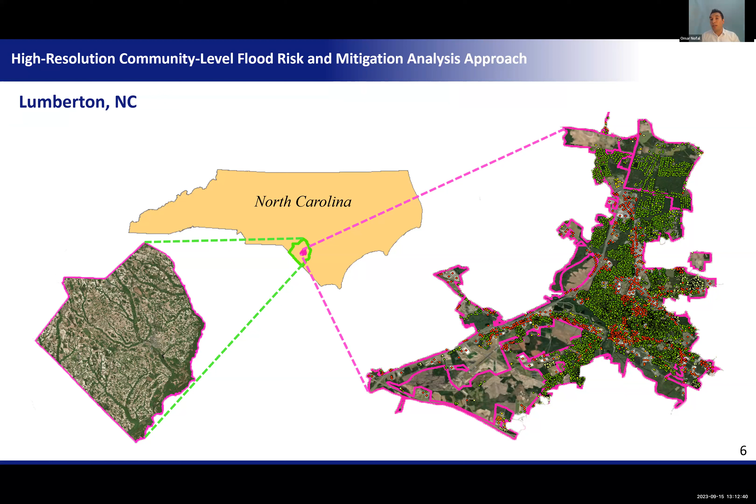Let's first see what the hazard modeling includes for this community. We developed a very high resolution hazard model. We used the digital elevation model of the study area and performed hydrologic modeling using detailed rainfall information along with land use and soil to identify the amount of water flow in each stream within the study area during an extreme event. The hydrologic analysis allowed us to capture a hydrograph, which is the amount of water flow over time. During an extreme event, the water flow peaks up, and after the event, it goes down.

So this is the main purpose of doing hydrologic analysis: to capture how the flow is changing in the main rivers within the study area. Then we use this flow hydrograph as a boundary condition for a hydrodynamic analysis to develop a hazard map. And this flood hazard map basically captures the spatial distribution of the flood hazard intensity, like the spatial distribution of the flood depths across the community.

Then we overlay these flood depths with the exposed assets like buildings and infrastructure to identify the level of exposure of each asset, like what is the flood depth at each building or at each infrastructure. Once we identify the flood depths or the flood velocity and the flood duration at each one of these assets, we can use vulnerability functions, which can be fragility or loss functions. And that tells us what is the failure probability of this asset corresponding to the flood depth that this asset is exposed to. So this is basically an overview of the flood risk analysis approach.

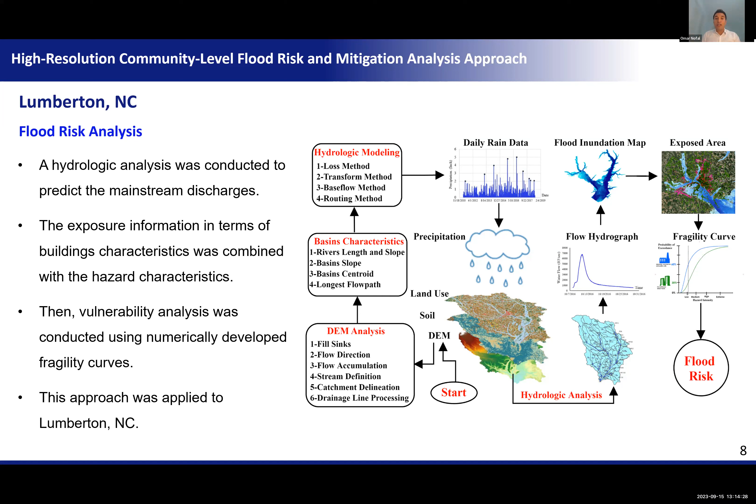So let's see what flood scenario we have here. We use the rainfall event after Hurricane Matthew in 2016 as a hazard scenario for this study. Hurricane Matthew started as a Cat 1 storm on September 29, 2016 in the Caribbean, and intensified to a Cat 5, but when it made landfall on the coastline of North Carolina on October 8th it was a Cat 1 storm, but it brought lots of rainfall to the inland communities. So it wasn't only a coastal crisis, but also inland communities such as Lumberton were exposed to lots of rainfall.

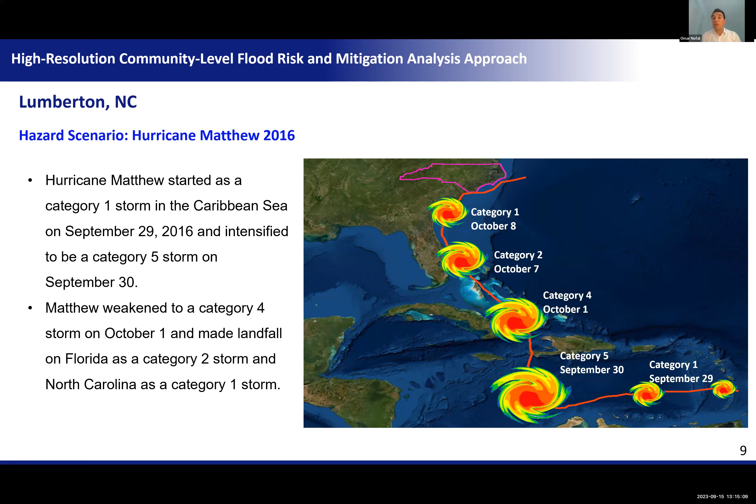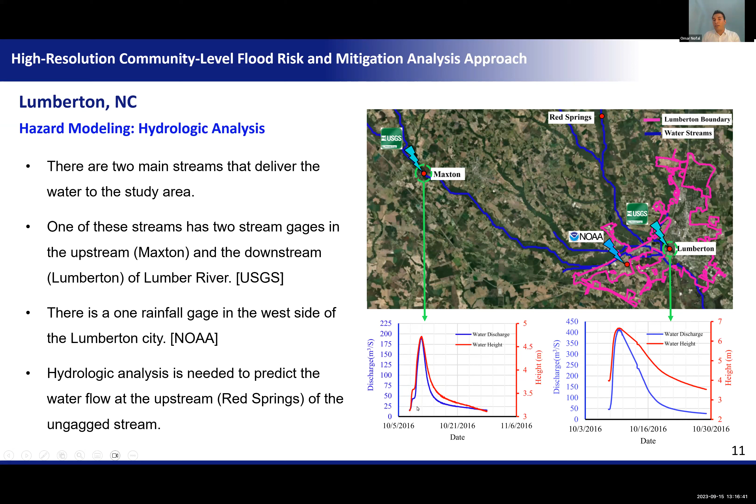So we used this rainfall information to perform hydrologic analysis, and we identified the amount of water flow in the main streams that deliver the water to the study area. As we can see, here's the geographical location of Lumberton, and the blue lines represent the main rivers that deliver the water to Lumberton. So the mission of the hydrologic analysis is to identify the water flow upstream, so that we can account for the amount of water flow downstream in Lumberton and identify the flood depths. Once we identified the water flow in terms of a hydrograph that captures the water flow over time, we use this as a boundary condition for a hydrodynamic analysis.

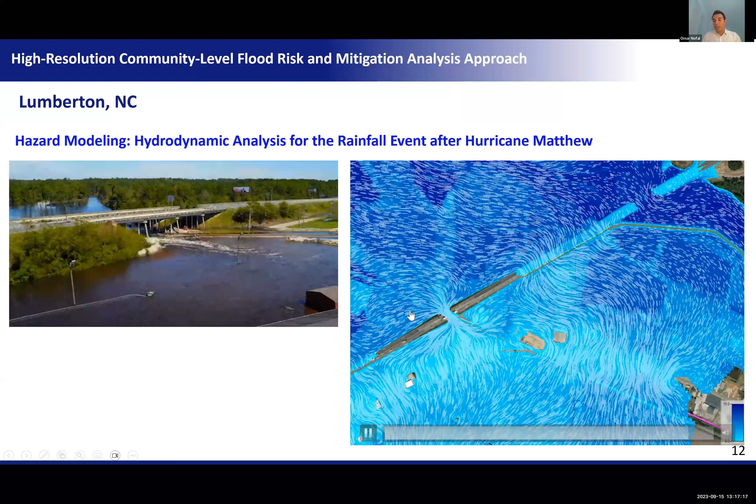And this is a close-up view of the state of flooding at the same bridge from a different flood, 2 years after this event, from Hurricane Florence. It had the same issue, but this flooding was much less than the one from Hurricane Matthew.

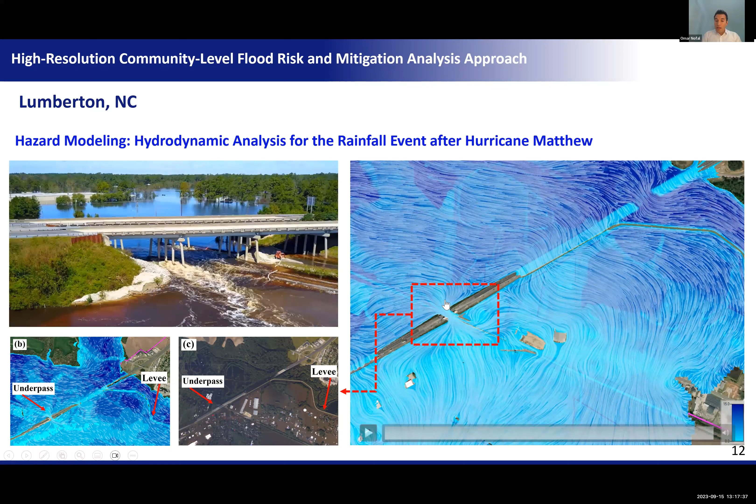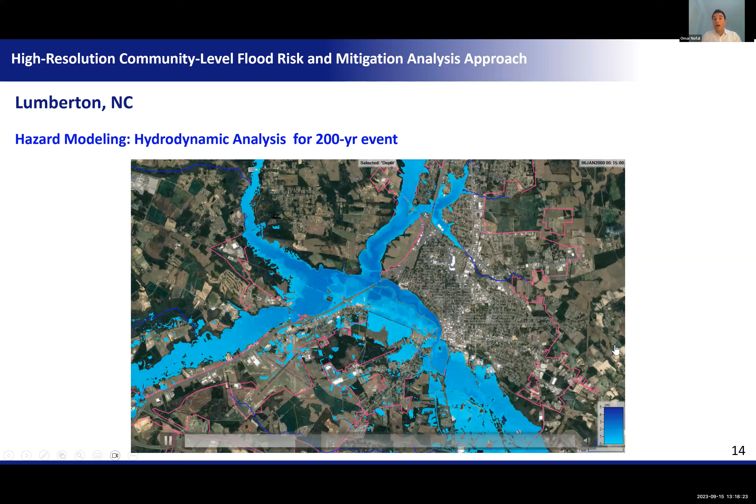And we have simulated a 200-year event, which is kind of similar to the flood event after Hurricane Matthew. As we can see, there's the same flooding behavior and around the same flood hazard intensity at most of the impacted Lumberton areas. So this is for hazard modeling. Right now I'm going to shift to the community and exposure modeling.

So we know the state of the hazard intensity across the community, but we want to know what assets are exposed to this flooding. But first, we need to identify these assets.

To identify the assets exposed, there wasn't much information at that time about the buildings in Lumberton. So we used Google Street View to navigate Lumberton city building by building, collecting detailed information about the buildings, specifically the first-floor elevation, because the first-floor elevation is one of the main parameters that accounts for the amount of flood damage inside the building.

But we collected other information, including building material, number of stories, occupancy, building use, building archetype, foundation type, ground elevation, building area, and maintenance status of the building. We collected lots of information about these buildings.

Then we developed a portfolio of 15 building archetypes. These archetypes include residential buildings, like we have 4 residential buildings, F1, F2, F3, and F4. We have a bunch of commercial buildings, including a gas station, a strip mall, super shopping centers. Also, we have some social institutions, including hospitals, schools and community centers. So we developed these archetypes to represent the different building typologies within the community.

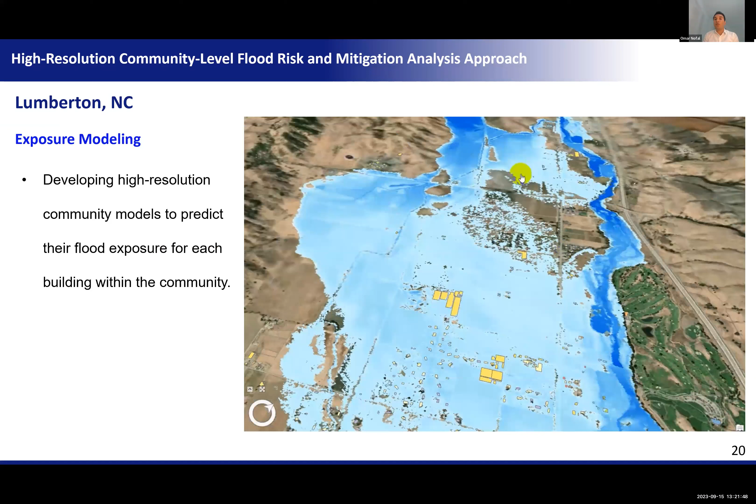After that, once we identified the community and the assets and their types, we overlay the hazard model that we have with the community model that we developed to identify which building is exposed to flooding and what is the flood hazard intensity at each one of these buildings. What is the level of flood hazard intensity? Like what is the flood depth? What is the flood duration? What is the flood velocity?

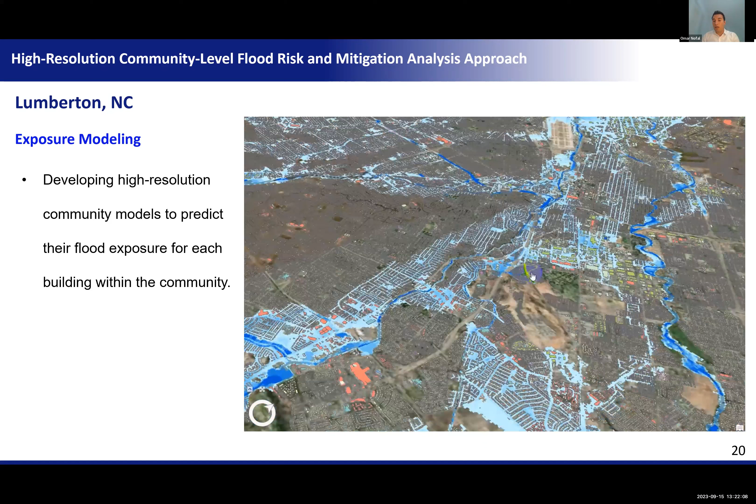And we applied this to many communities. This is just one example that shows how we accounted for the exposure at the community level.

So the next step is to do vulnerability analysis. We identified the hazard intensity at each building. So next we need to know, if a building has a 2-meter flood depth, what these 2 meters can do to this specific building. And definitely if this building is residential, it's completely different than if this building is commercial, because each has different components.

So we developed a single variable and multivariate flood fragility and loss analysis approach for buildings. Basically, if we have a building, we divided this building into components, and we studied the flood susceptibility of each one of these components separately. For example, we used a probabilistic approach using a truncated normal distribution that uses the upper and lower bound of the elevation or the damaging depths and the damaging duration for each component.

For example, if you have a TV in your home, this TV can be mounted on the wall, at 1.5 meters from the ground, or it can be on a table, like 2 feet from the ground. So you have an upper bound and lower bound for the elevation of the components. Same thing with the AC unit. Some people have the AC unit on the ground or elevated from the ground. So we did this for every component, and we used Monte Carlo simulation to propagate the uncertainties in the elevation, the damaging elevation and the damaging duration in each component.

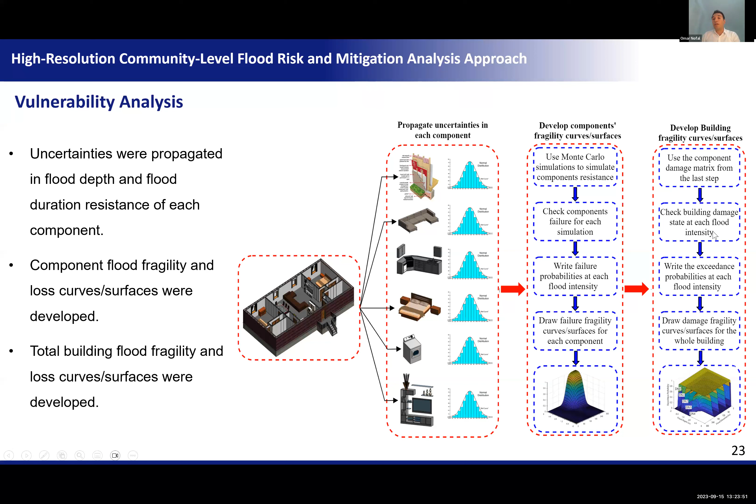Once we identified the failure probabilities of the components, we used the damage states that we developed to identify the exceedance probability of each damage state for the building. So this is an example that shows how the probability looks. This is an example for an AC unit.

So we used our best engineering judgment to identify the upper and lower bounds for each component within the building, and then we used a Monte Carlo simulation using the probabilistic parameters for the elevation of these components to propagate the uncertainties in the damage that can happen to each component within the building.

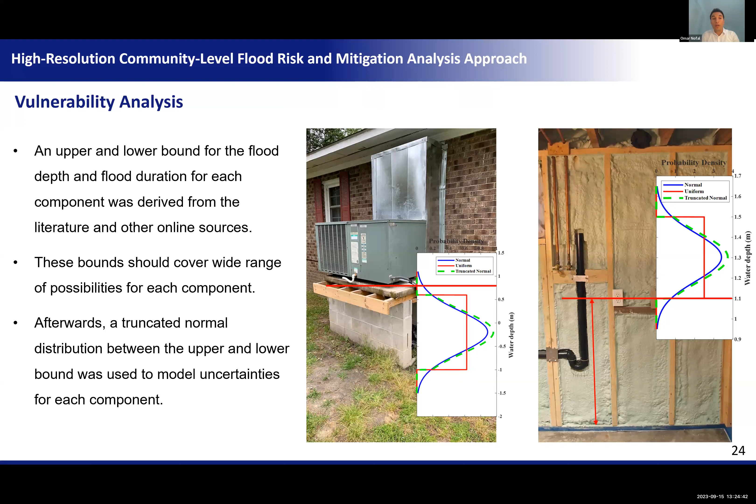This is an example of the damage states that we developed, from damage state 0 to damage state 4. Damage state 0 is insignificant damage, like the building can be surrounded by water but not damaged. Damage state 1 is like having 2 inches of water inside your home that can cause damage to the carpet and flooring. Damage state 2 is like having 2 feet of water inside your home that can cause severe damage to your appliances, content,

furniture. Damage state 3 is extensive damage, where the flooding reaches maybe 4 to 6 feet and causes severe damage, but not complete structural damage. For damage state 4, which is complete damage, we assume that the structure has complete damage, even damage to the structural system itself.

And we have all the statistical parameters for these components, and we grouped them based on their damage state. For example, you will find some groups are in damage state 0, some in damage state 1, 2, 3, and 4. This is based on our damage state description.

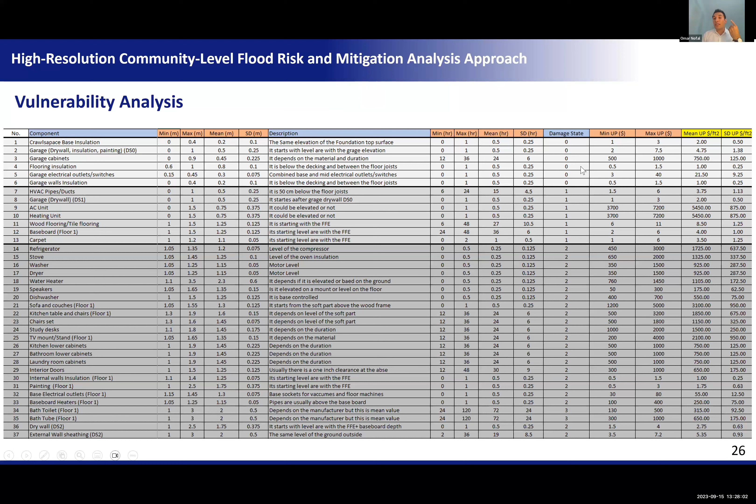As you can see, components 1 to 6 contribute to damage state 0. Components 7 to 13 contribute to damage state 1. So basically, the fragilities of these 6 components make up only 1 curve, which is damage state 0, and 7 to 13 make up 1 fragility curve, which is damage state 1. The same thing was applied for many other archetypes.

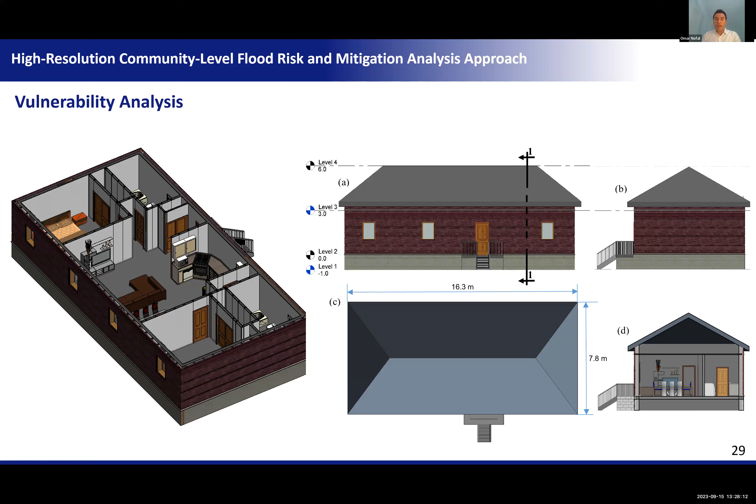So for example, if you have a fridge that is worth $1,000 and the failure probability is 50%, you multiply 50% by 1,000, so the loss is going to be $500. And if you have 100% probability, the loss is going to be $1,000. So as soon as the flood depth is changing, the failure probability changes, and also the losses are going to change. Same thing we have done with the building fragility curves.

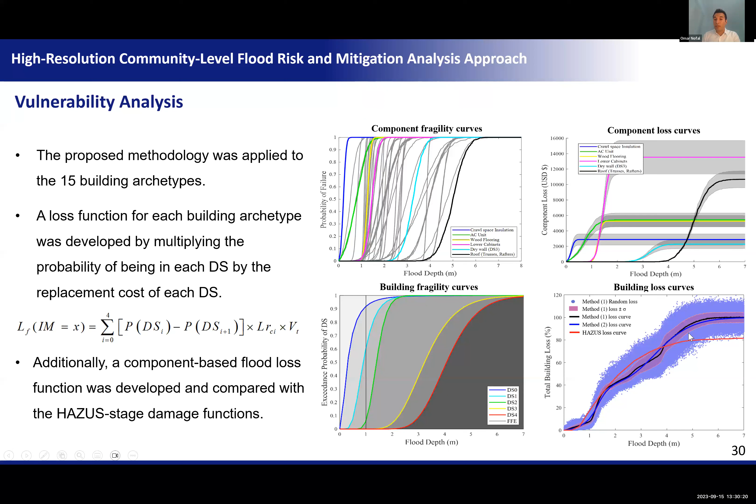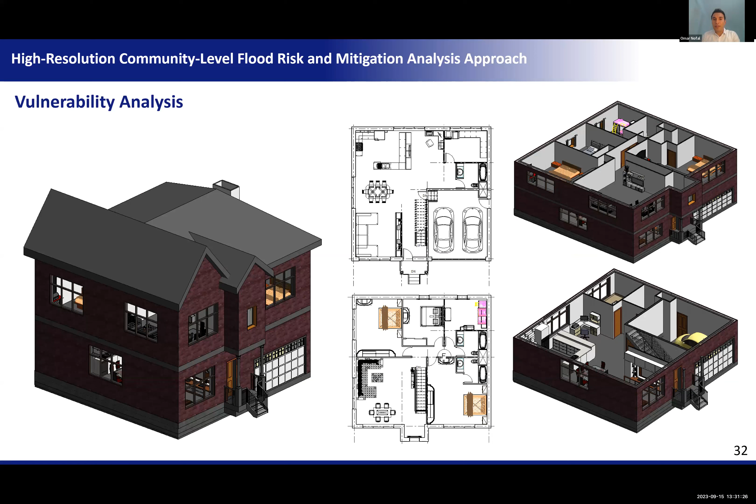We have applied this approach for all the 15 building archetypes. As you can see here, this is the 2-story residential building. We also have multifamily, 1-story multifamily buildings, gas station, shopping center like Walmart. And we build a BIM model for each one of these archetypes, representing each component within. In this Walmart example, you can see the fridges, the aisles, every section within Walmart. We take a real footprint of Walmart, even the loading area and all the storage area in the back.

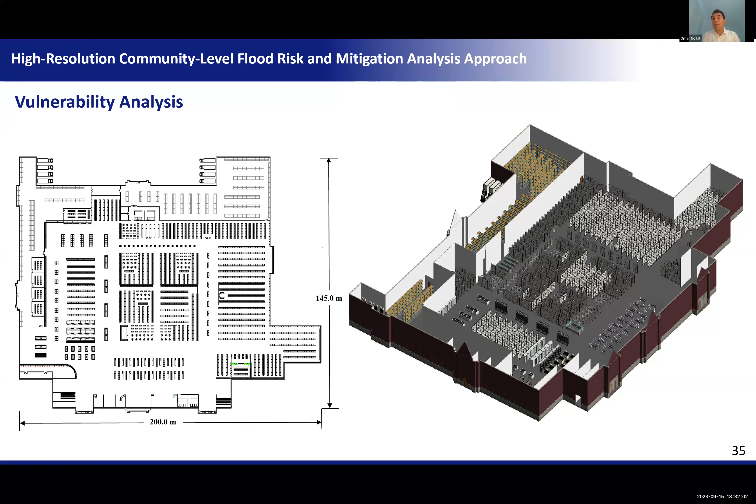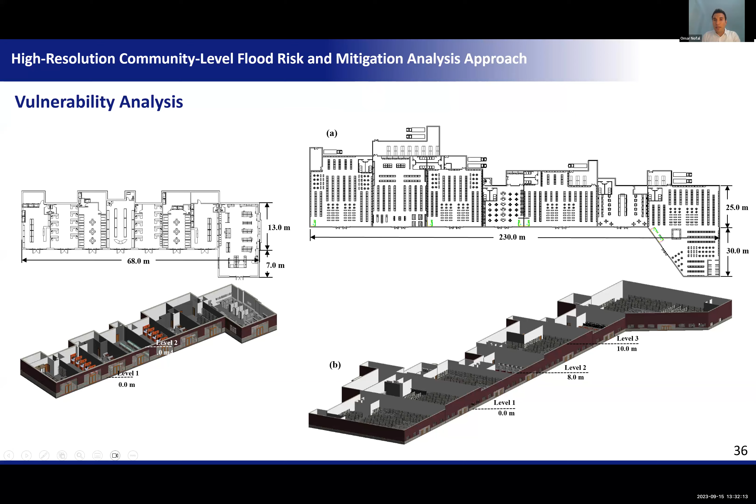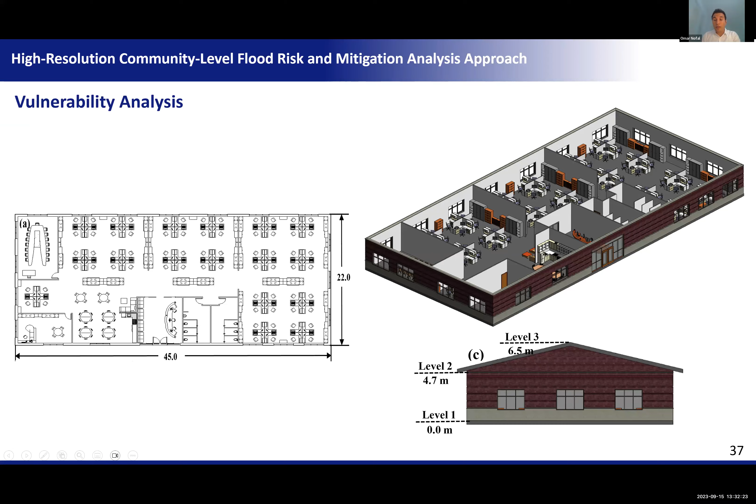So we have every component. We actually modeled every component in each shelf. Same thing with strip malls, multi-unit family buildings, office buildings. This office building is the same: we're including every computer device within this office, every component within each one of these buildings. Similarly, schools, hospital, community center. So we have done this for all these archetypes.

And this is just to summarize, showing the fragility curves for each damage state for the 15 building archetypes, from archetype F1 to F15. And this is damage state 2 with all the archetypes, damage state 3, and damage state 4.

I'd like to mention that the methodology that we developed for the flood losses has been used by the White House, by the Office of Management and Budget in the White House, to assess the impact of climate change on federal facilities. So the approach has been used widely in the industry and also by many federal institutions, including NIST and the White House.

So right now we have seen how the hazard models, the exposure models, and the vulnerability models were developed. And all of these are still separate. So how can we combine these three high resolution models to come up with a systematic approach that tells us the state of damage for each building within the community if it was exposed to a specific flooding event?

So we developed a community level vulnerability analysis that uses detailed information about the hazard, the building characteristics, the fragility curves, and does building by building analysis, identifying the exceedance probability of each damage state. For example, for building 1, identify the flood depths, use the specific fragility associated with this building archetype, and calculate the probability of exceeding each damage state, and then the probability of being in a specific damage state, and identify what is the maximum probable damage state that this building is going to have.

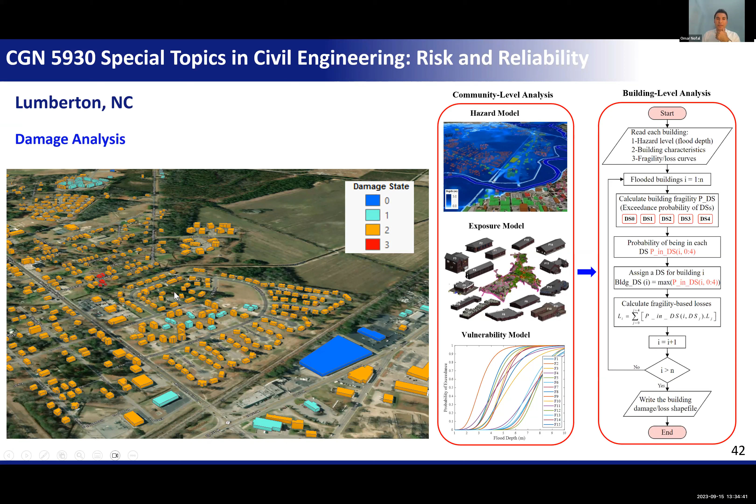So, for example, a building can have a maximum probable damage state of damage state 2. Then we assign damage state 2 for each one of these buildings, and then calculate the losses for each one of these buildings. Once we identify this for building number 1, we keep looping until we finish all the buildings. So this is the results for the buildings within Lumberton, color-coded based on their damage states from 0 to 3. We didn't have a damage state 4, so that's what we have so far.

With this, I'm going to shift to the next topic, which is the mitigation analysis. So how we took advantage of the method that we have developed to do a mitigation analysis at the community level. So there have been many mitigation approaches for buildings exposed to flooding. Some of them are at the component level, some at the building level, some at the community level. However, there haven't been many approaches that can account for the amount of saving that the building

is going to have. For example, if you use sandbags to protect your building, or even if you take advantage of the extra time that you have to elevate the water sensitive components, including furniture, electronics, like your computer, your TV, or any expensive component within your building that can be elevated in like 1 or 6 hours. So we were able to do this using this high resolution approach.

So basically, we developed a framework that used all the details that we have, including the flood hazard map, the building characteristics, and also information about the flood mitigation measures that we are using. Either the homeowner is using a water pump to decrease the flood duration, or the homeowner is using, for example, a flood barrier, like a bladder dam or a sandbag system, or whatever system that he has.

And then we do a vulnerability analysis using fragility on the left side. So this is the process for it. And on the right side is the vulnerability analysis using loss analysis. Like we need to know the amount of flood dollars that this homeowner is going to save by using this mitigation measure. So we either can have the vulnerability in terms of damage or in terms of losses.

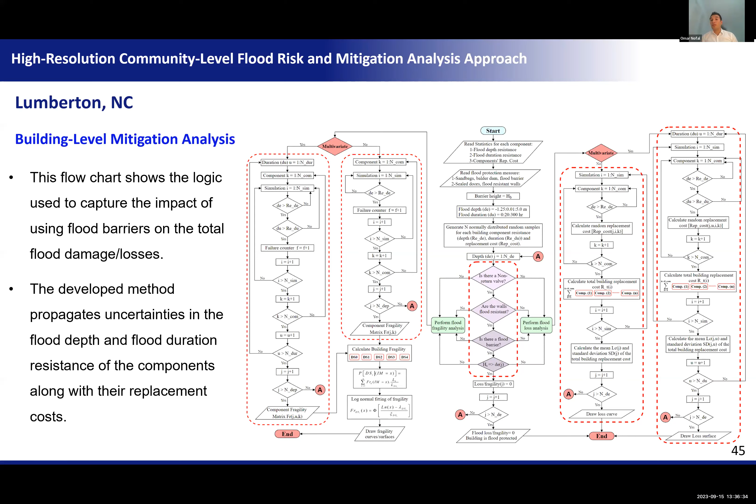So let's start first with using temporary barriers. So homeowners can use temporary barriers to decrease the flood depth. So basically, what we have done in our approach, if the flood depth is less than the barrier height, the amount of losses is 0. But if the flood depth is more than the barrier height, we are hitting back to the curve. Same thing with the flood fragility.

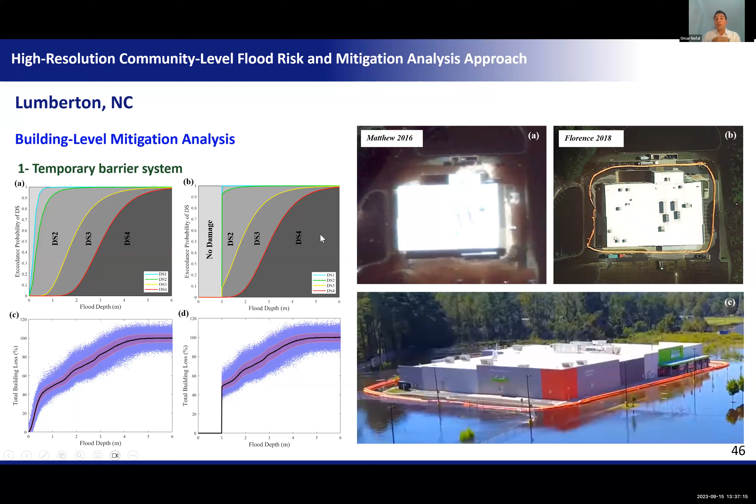So, for example, if you have a flood barrier of 1 meter, you have no damage, but if it's more than 1 meter, you will jump back to damage state 2 and 3 and 4. Also, we investigate the impact of using a water pump to decrease the flood duration. And we take advantage of the multivariate vulnerability function that we have. So we have the flood surface, and basically, if you are using a water pump to decrease the flood duration to 24 hours, we have a flood loss curve for 24 hours duration. We have one for 48, 6 days, 8 days, up to 10 days.

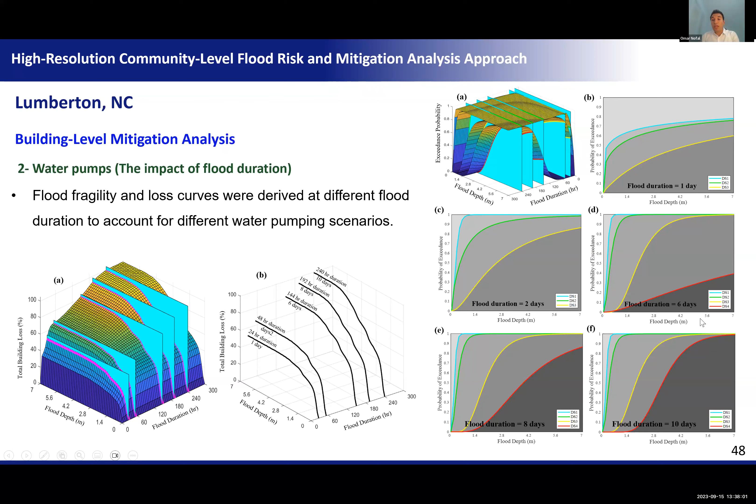Same thing with the fragility. So go to the next. Same thing with the fragility functions. So we have here the fragility function for 1 day, 2 days, 6 days, and also up to 10 days.

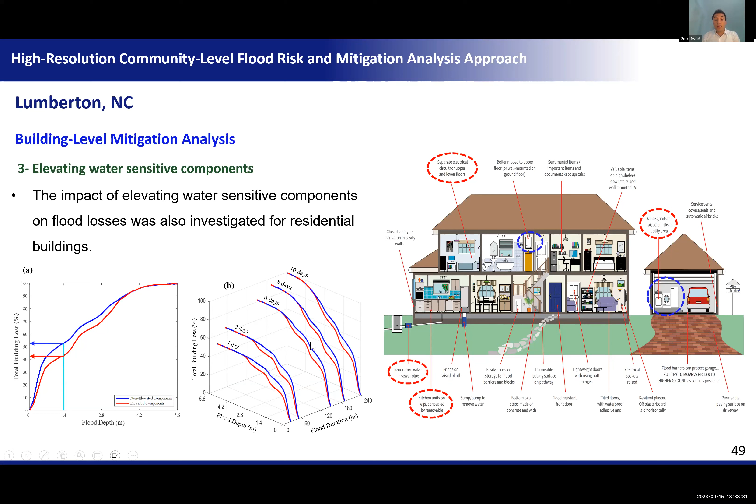Also, we investigate the impact of elevating water sensitive components. What if a homeowner was able to elevate TVs, computers, or any water sensitive component in his building? So we were able to capture the difference between buildings with non-elevated components and elevated components, and show loss savings of about maximum 10% of the building value, which can be maybe 20 to 50K based on the home value.

Also, we investigated a combination of mitigation measures. What if the homeowner were able to use a flood barrier like sandbags along with pumps? So we combine these together to come up with loss curves that can tell us what the combination of these mitigation measures is going to do in terms of flood loss reduction.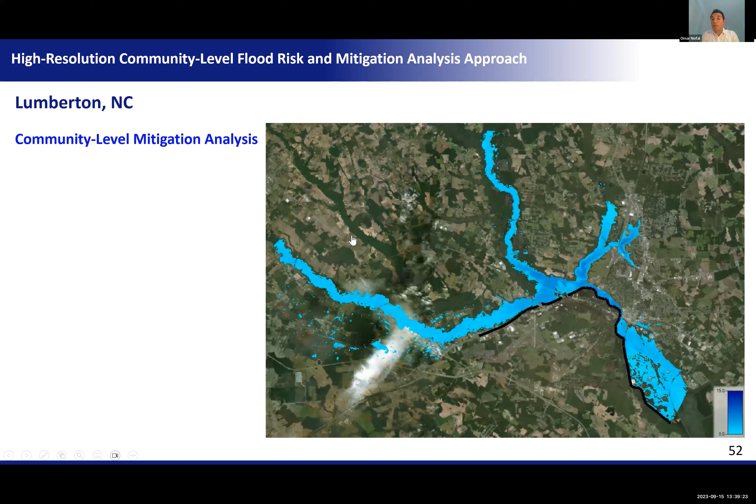Lumberton. I'm going to show one example of one of the mitigation scenarios at the community level. We enhanced the levee system, and as we can see, it provides full protection for the downstream here in Lumberton, and tamed the Lumber River to flow in its own stream.

So with this, let's summarize and conclude the work that I presented here today. I presented a component-based multivariate probabilistic flood vulnerability approach for buildings. It accounts for the impact of flood depth and flood duration on the amount of damage and losses for buildings. The developed vulnerability approach was applied to 15 building archetypes, and it's general and can be extended to any building of interest.

And we conclude that flood depth alone may not be enough to accurately predict the amount of flood damage, and the inclusion of flood duration gives a better estimate of the flood damage. The fragility-based multivariate vulnerability analysis that we have developed here can provide a mechanism to propagate uncertainties in the damage and loss estimates for buildings.

And combining structural and content damage can provide a better estimate of the final damage, because most of the functions out there rely mostly on structural damage, but content damage is as important as structural damage. For recommendations for future research, actually most of this future research we have been working on; we just submitted two papers this week related to this work.

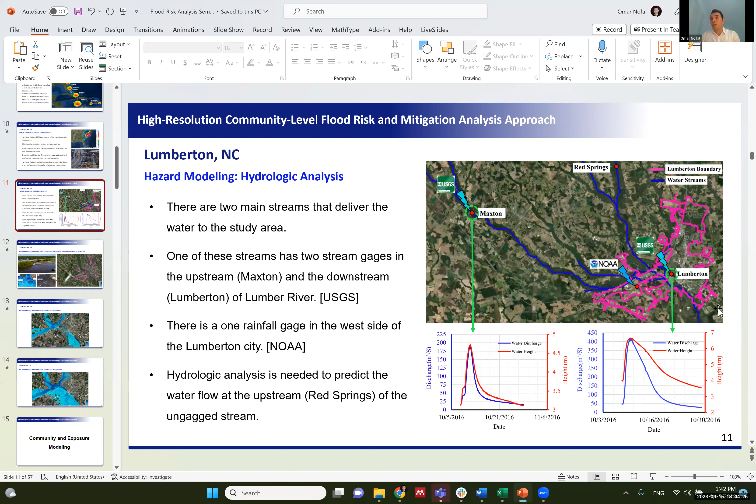Yeah, so there was a challenge here; we had to do hydrologic analysis because USGS provides the water flow at one of the upstreams, but one upstream, here at Red Springs, was missing, so there wasn't any USGS gauge. So we had to do hydrologic analysis to identify the water flow at this gauge. Then we validated it with the USGS gauges, and then we did all the hydrologic analysis for the study area to do the hydrodynamic analysis as the next step.

Okay, great. And one more question, it was, I guess, on slide 17.

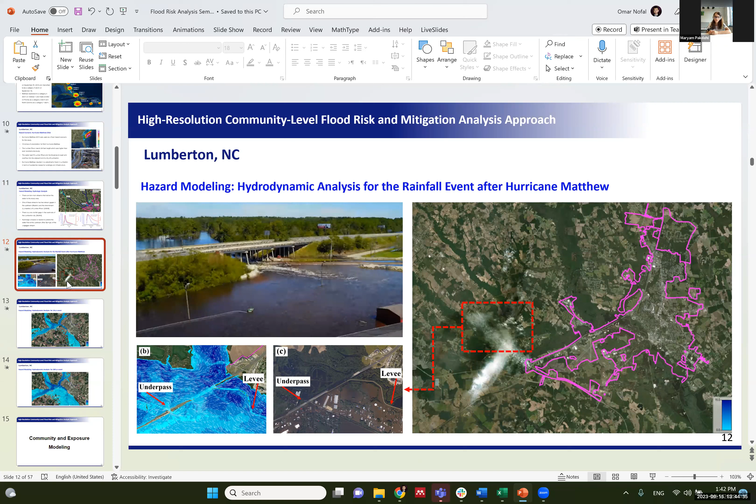Okay. I guess you found some building information, and this one? Yeah, that's it. And I want to ask where did you actually find this information? Because I want some kind of roof age information for different buildings, and I don't know how I can get them. Oh, you were asking how did I get the information for these buildings? Yeah, exactly. Well, I built these buildings from scratch, building by building. Ah, okay, I see.

Well, okay. So we tried as a team to identify, because right now these are 15 buildings, and the level at which they are modeling the community has a specific resolution. If we want to go up in resolution, we need to make these 15 into 100 or more, maybe 200. As soon as you increase the building typologies, you will have a more accurate model. But I cannot develop fragilities for all these buildings by myself. So we decided to come up with 15 building archetypes, and this is enough to model most of the buildings.

As you can see, we don't have buildings with more than 2 stories. So if we have a building that has 5 stories, it cannot be modeled, but most of the buildings within the community are around 1 to 2 stories. So if we have 10 or 15 that are multi-story, and we have 20,000 buildings, even if we have 100 or 200, it's fine, as long as we are trying to capture most of the buildings within the community.

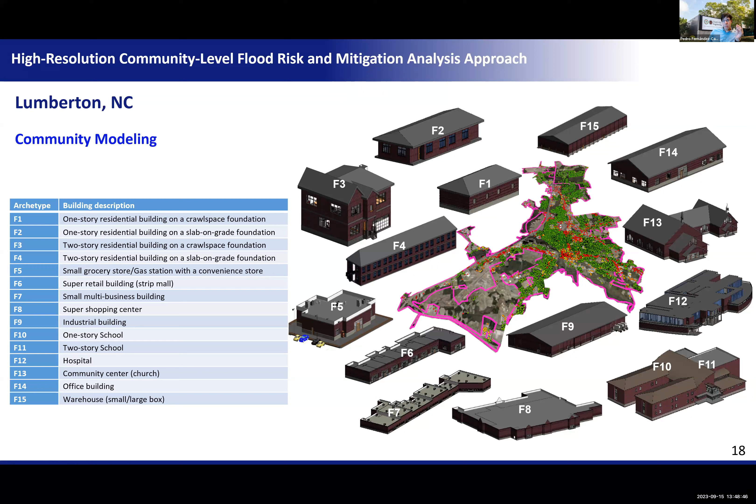Because I know a lot of our grad students work with GIS mapping, but I think resolution is usually a problem if you want to go really fine, high resolution. And other types of information you mentioned, for example first floor elevation, which is critical for flooding. You mentioned relying on Google Street View. What other sources can you use to extract that information?

Okay, so the state of North Carolina is actually one of the best documented states in the entire US. They have a very well-organized database for all the buildings. If you check NC OneMap, you can download the 10 million buildings within the state of North Carolina, which has detailed information.

It can tell you how many nails are in each panel on each roof within each building in the community. So they have detailed information: seismic, wind, flood, even the first floor elevation, and when we do analysis with North Carolina, it's really like a piece of cake. But if you go to other states, it's really difficult to find this information.

So, for example, we have done a much more advanced hurricane model than this one, because we include the surge, wave and wind, for Waveland, Mississippi, which is a 3,000 building community. So we had to do building navigation through Google Street Map View. If it's 3,000 buildings, we can do them. We can hire grad students to navigate the buildings in a month or so.

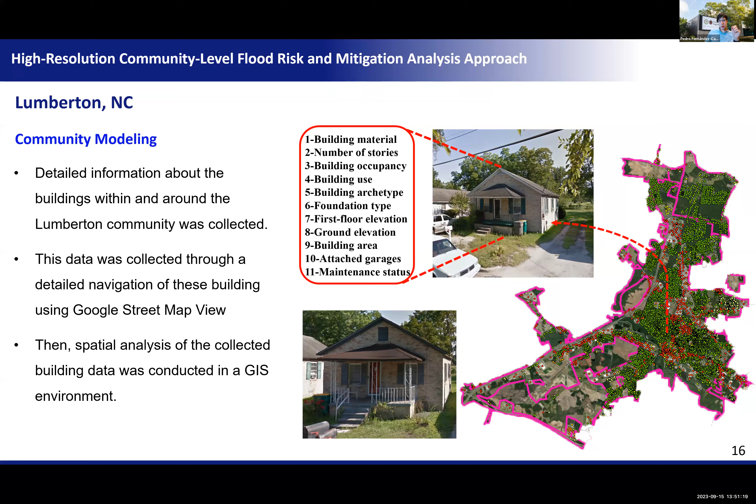I only had one final question, and I'll leave it at that. The damage states that you mentioned for flooding, I think they were mentioned in a qualitative manner. Are those from FEMA, or where can we find those?

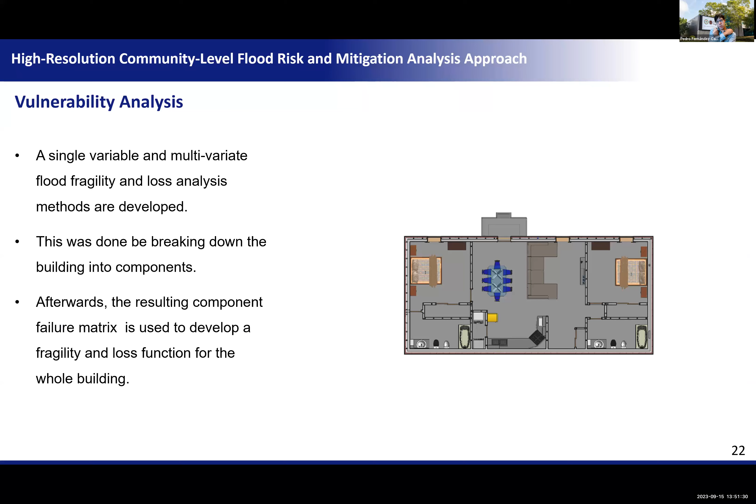Yeah, so we developed these damage states as a part of the NIST-funded Center for Risk-Based Community Resilience Planning. There's no fragility function for flooding, so it's not mature research like seismic. Seismic has lots of research in terms of fragility functions developed for buildings. There were just a few researchers that started to work on flood fragilities, and we are one of them; we started 5 or 6 years ago.

So there weren't many damage states. Most of the damage states are insignificant, slight, moderate, extensive, complete. This is a general damage state description for any building, whatever the hazard is. But we need to agree on the components that tell whether this building is slight, moderate or extensive. So it was expert judgment, and it also matches the FEMA description for a damage state. If you check the FEMA damage state for flood, it's almost the same.

But what we have done, we got these damage ratios. We said insignificant is from 0 to 3%, 3% to 15% is slight. We have done detailed damage analysis for each building, and we know the components that contribute to the slight, and we know the value of these components, and we got the average, and it gives us this range. Okay. Yeah, that's excellent. Right. Any other questions?